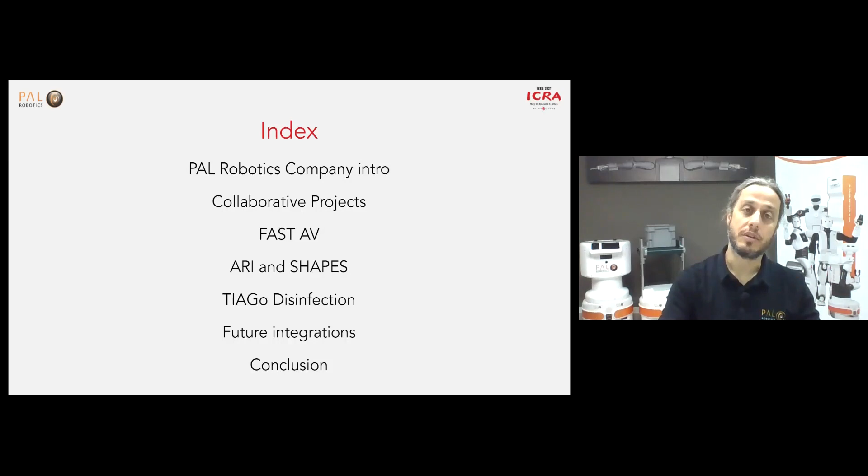Let's start with our company, which was founded in 2004. I'm the owner and one of the founders, and we started this adventure in Barcelona. From that time, more than 16 years ago, we now have more than 60 people continuously integrating and developing new solutions with service robotics.

At the moment, we have detected 5 different business units: from social robotics with the ARI and TIAGo platforms, to the product for research, where a lot of expertise is in moving these biped humanoid robots, and we are quite active in collaborative projects.

From an industry point of view, we are working in retail and in the intralogistics part, where navigation is one of our know-hows that we try to use every day.

And just to have one picture that is worth more than a lot of words, you can see here most of our developments. The first one you can see here is now in the Science Museum of London, a big part of the history of European robotics development.

I have to mention that we are also a founding member of EU Robotics, and also HispaRob and AR Automation, which are a Spanish association of robotics.

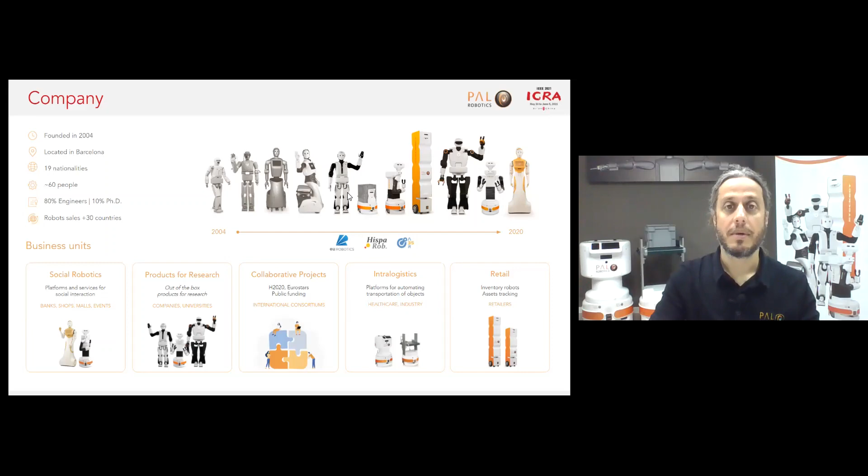But now let's go to what we are able to do. Our expertise is very vast, very large, and integration takes a lot of emphasis, because our idea is to fill the gaps between what could be very exciting from a research point of view to the real world.

Our dream is to see more and more robots in a real environment that could help people, and for this reason you need a lot of expertise, which you can see here.

We are working on projects, private and also public, in different domains, as you can see here: from R&D, where we are very strong, to retail, industry, and the healthcare part.

But now let's focus on the collaborative projects, which are also a very good tool to help us put these robots into real pilots and demonstrate that what we have in mind is feasible and could have an appropriate return on investment.

I have to mention these collaborative projects that are ongoing now, and also some past projects that helped us make these developments. The important thing is that we are not only focusing on R&D, research and development, but also making a strong impact in industry and healthcare, and now we've also started with agri-food.

We just started 2 big projects that will help automate the agriculture field for all these kinds of use cases. So with special mention for the COVID pandemic situation, I have to mention these 5 projects.

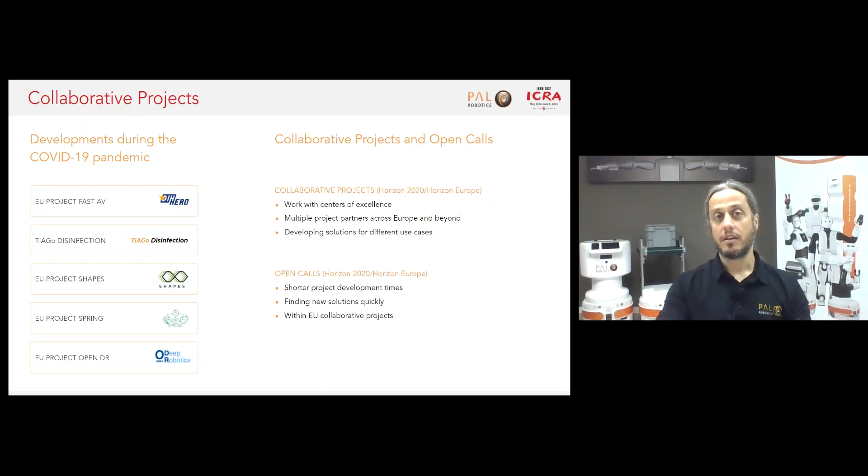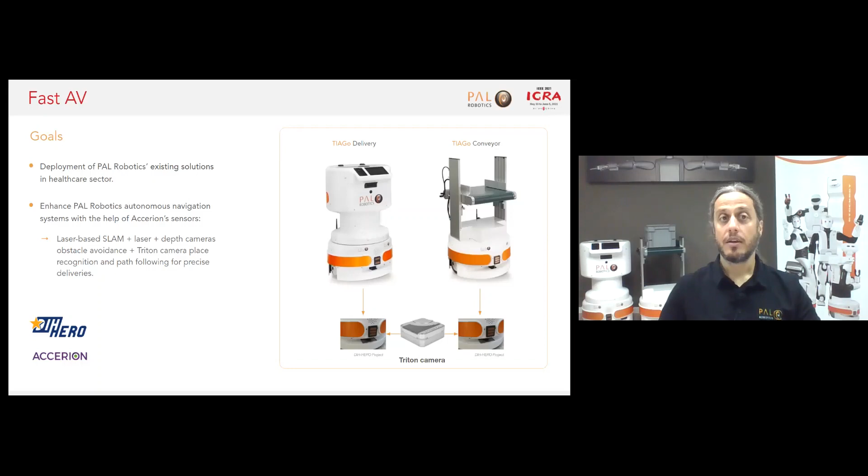One example of this is Fast AV, a project we did last year in the Digital Innovation Hub, in collaboration with Accerion, a Dutch company that provided us the Triton camera to improve and enhance the navigation system. Our solution was a laser-based SLAM, and the idea was to deliver parts inside a hospital, and also food for patients in bed. I'll show you a video that makes this use case simple.

From one side, we developed and enhanced the TIAGo conveyor for transporting food trays in patients' rooms. The robot development was quite easy from a technical point of view, but putting these robots in a real environment means there are a lot of things that have to be taken into account.

The same applies to the TIAGo delivery, transporting sensitive goods inside the hospital. The idea is to not change the layout of the hospital infrastructure, and use our expertise to make this robot able to work with humans inside the actual hospital layout.

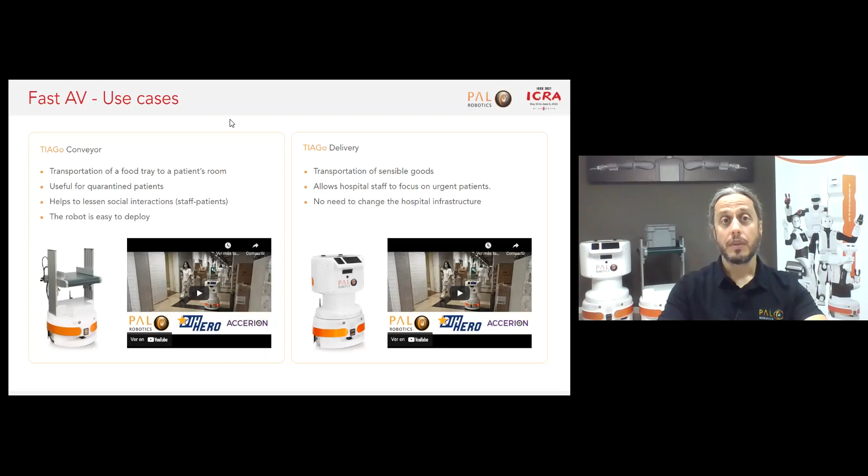It was a quite successful project, and we are now continuing to work especially with Hospital Clinic in Barcelona and Hospital de Badalona, to implement and make more tests with this robot, and also with another robot called ARI, Artificial Robot Intelligence.

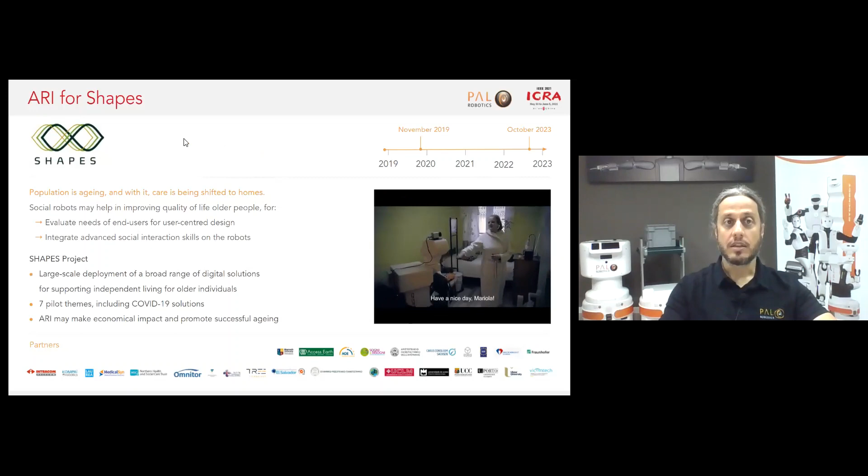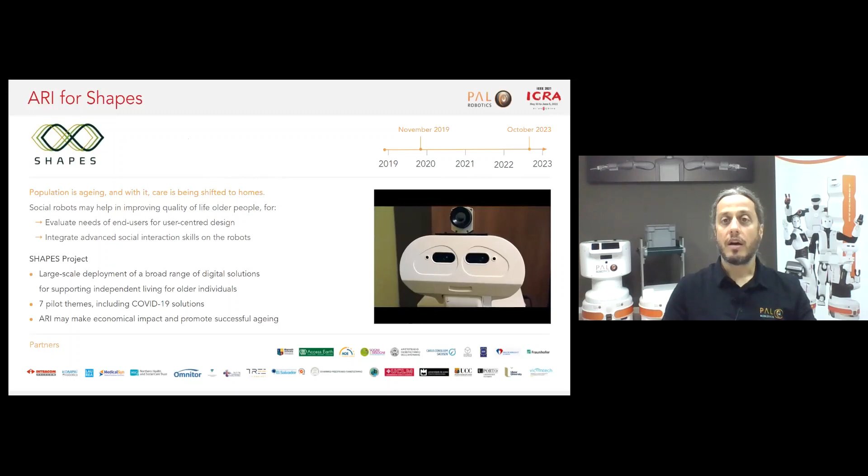I'll present here the SHAPES project, where the idea is to use this social robot to improve the quality of life of elderly people. We changed the use cases to have the TIAGo and ARI robots interact with elderly people in their own homes.

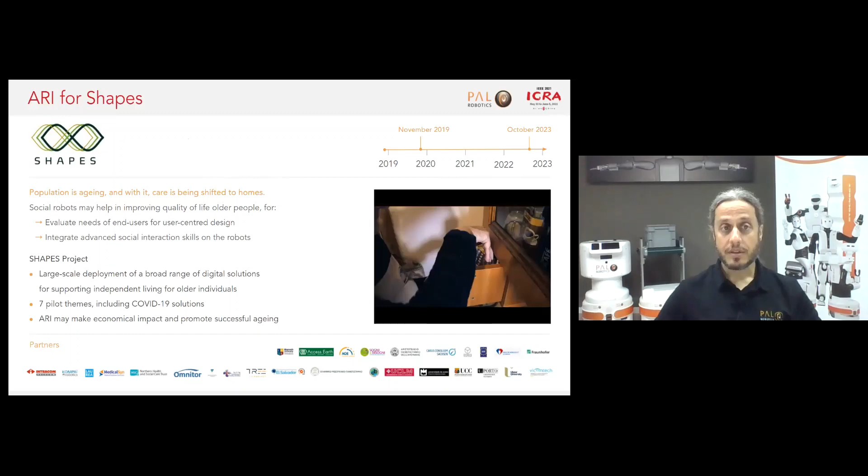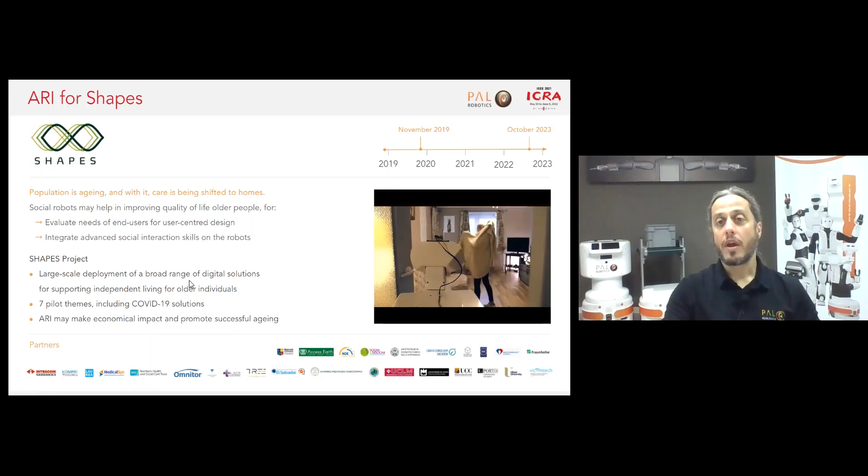The idea of this project is to have a large deployment in different countries, and at the moment we have started 7 pilots. For example, we're working on an island here in Spain with a very good center for elderly care, trying to make the ARI robots more and more accurate in order to successfully solve these use cases with aging people.

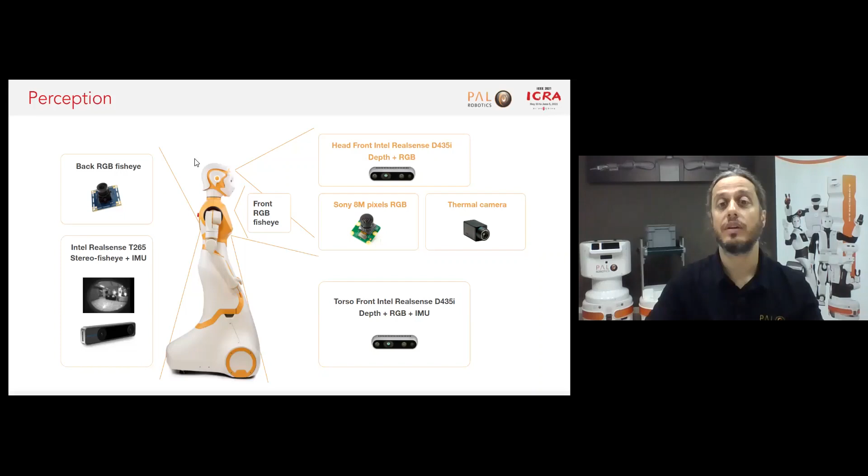Speaking about the ARI robot, I should mention some technical details that are important, like the perception devices we use inside the robot. One key point is we tried to decrease the maximum cost of the robot, so you can purchase the platform from 20 kilo euros. The idea is to have more and more devices to make these use cases better and better. You can see a lot of cameras here.

Another feature, added especially for COVID, was a thermal camera for constantly monitoring the temperature of people. Here you can see an example of the robot checking someone's temperature.

Imagine the robot in the entrance of a hospital, where it's just checking the people's temperature, and then can give the first heads up for the people. And going even more into the detail of COVID-19, we can see the TIAGo Disinfection robots.

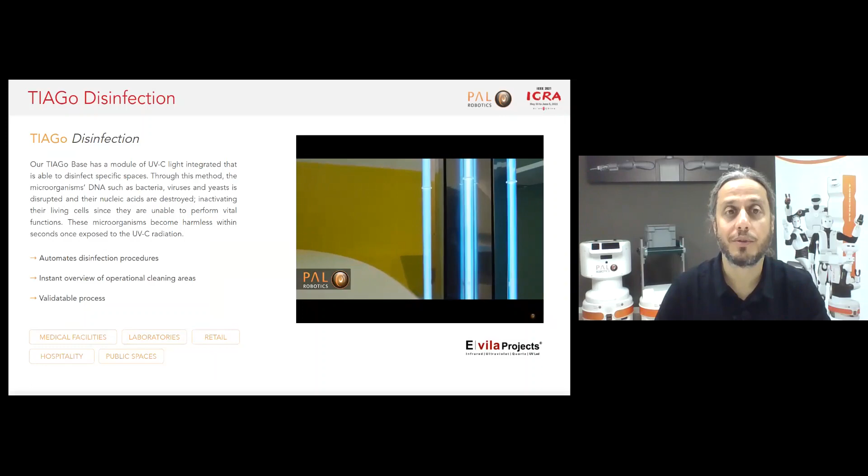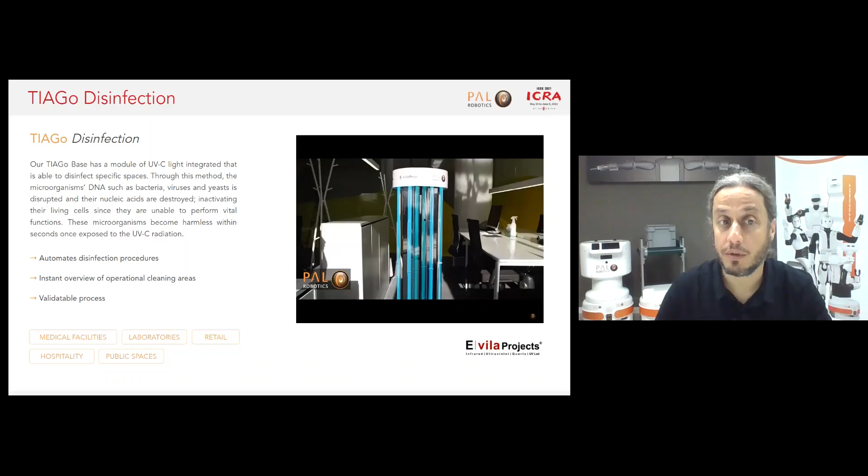The idea of these robots is just using UVC lights. It's not a new idea, but it's our solution, and we are not experts in disinfection. So what we did is collaborate with one of the most important companies based in UVC, that was very saturated here in Spain during the pandemic period, called Evila Projects, in order to develop our solution. So what we can do is automate this disinfection procedure and clean these common parts in order to make it COVID-free. That's the idea.

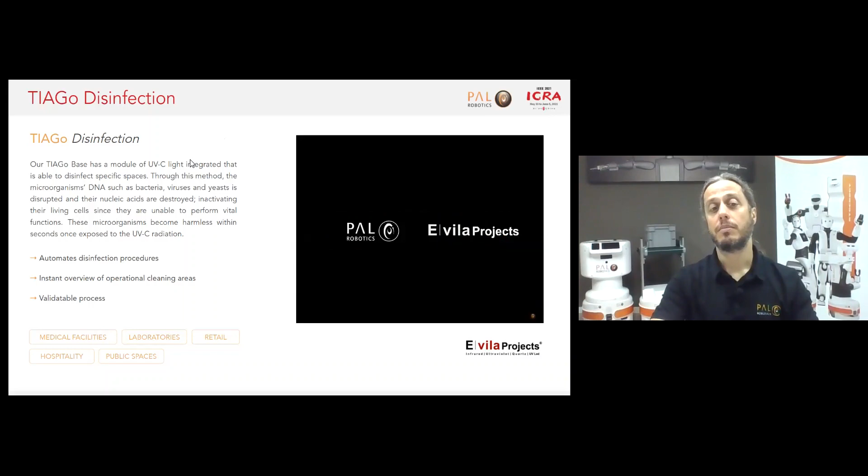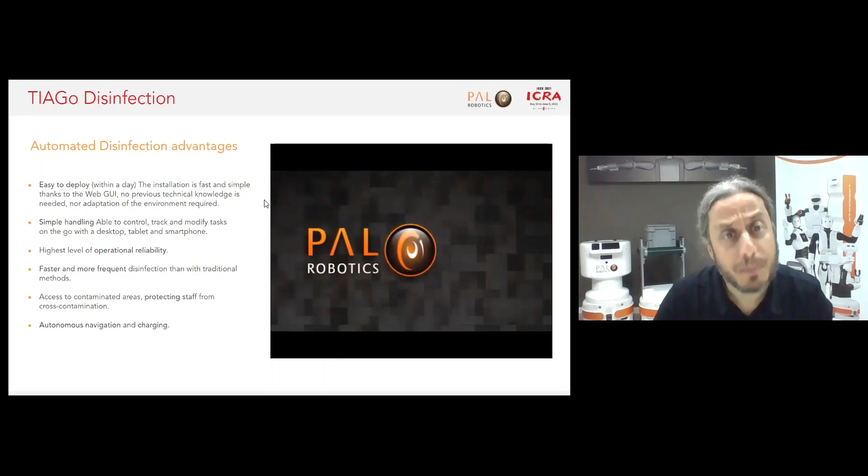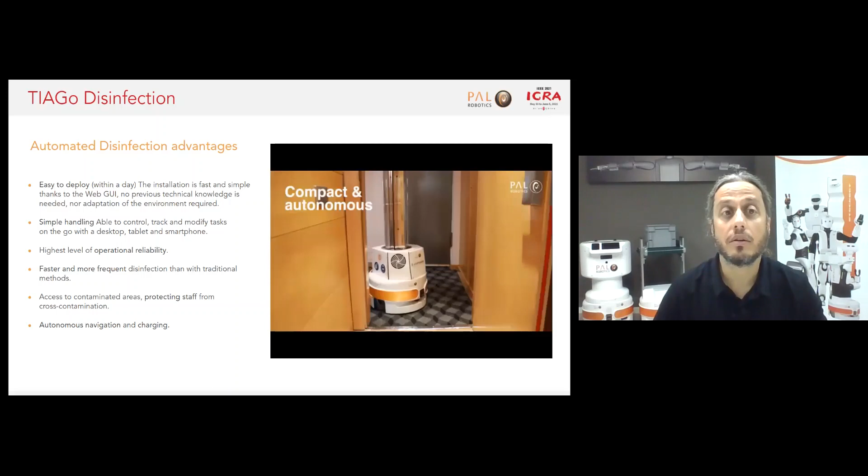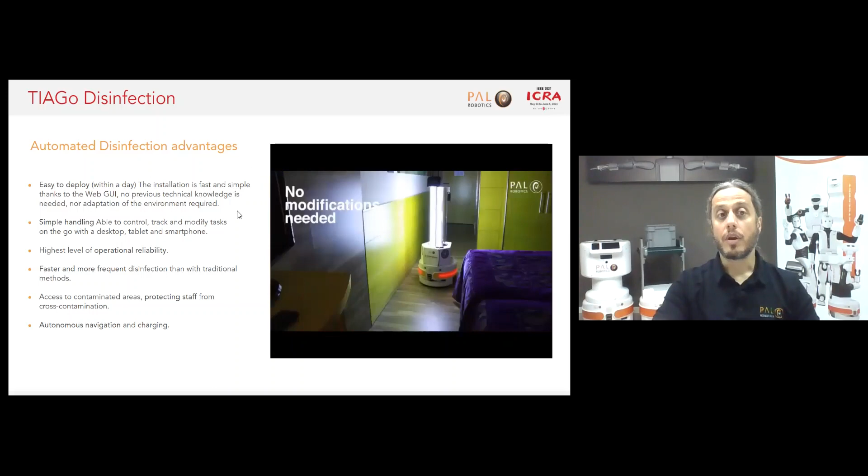It could be applied not only in public space, hospitality, but also in office environments, but also in hotels, for example. That's a big market that is opening, and the small footprint of our mobile base helps to not change any layouts in the hotels, for example, and with autonomous navigation, the robot can clean also during the night without people around, and this is something we are actively working on now, and it's taking more and more emphasis in order to help with this pandemic situation.

A lot more things could be done, and there are possibilities for more and more future integration. So the idea of this talk is also to inspire you a little bit about what could be done.

Instead of writing bullet points and just explaining, we tried to put some real images here in order to show you what we think is feasible, and from a technical point of view is achievable now, because the technology is already mature enough to do this kind of integration, in order to help the people that are working today to just focus on what is very important for their own use case.

So from a robotic cleaner, let's say TIAGo Disinfection, that just cleans and can help have a safe environment, we could also have, and we're already doing some deployment with, our stockbot solution with retail, but it could also be in supermarkets, or in different spaces, where we can also figure out robots with one arm, two arms, three arms, whatever, that can also pick and place and move parts around, for example in a hospital.

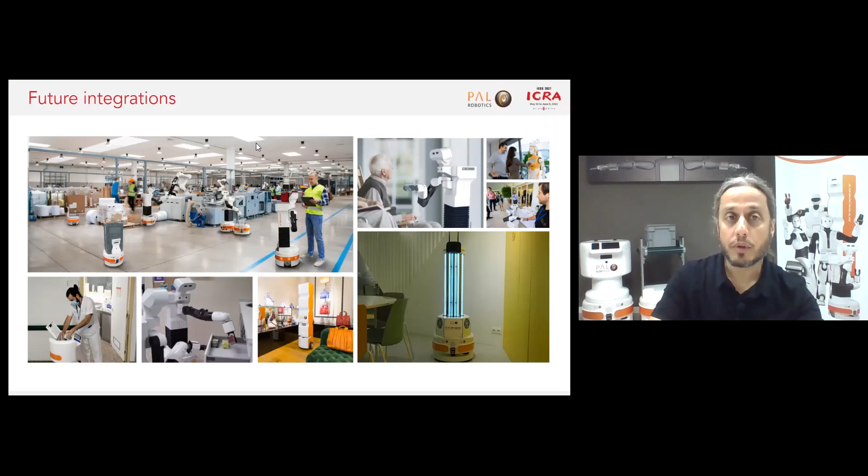And why not also help with elderly care, like we are already doing in different pilots. The idea is to use the robot not like a center of its own action. The robot has to be considered like a shared tool that could be used from a lot of points of view, for example from the family in case of healthcare, in order to connect, to interact. And the most important part of robotics, especially service robotics, is the interaction with the real environment.

So in order to conclude, I'll give you just two messages. One important message is that whatever kind of innovation we have to do has to involve collaborating with others. There's no one company, or one university, or anyone in the world that could make service robotics better alone. So collaboration is very important—please collaborate more and more.

Another idea is not only making research, but applying the expertise you develop in a real environment. This is very, very difficult in order to integrate all these solutions into the real world. And for sure, making the right partnerships, also from a business point of view, this could make our work better. And so we can really improve the quality of life of people in different environments, in different sectors, and make us happier. Thank you very much.